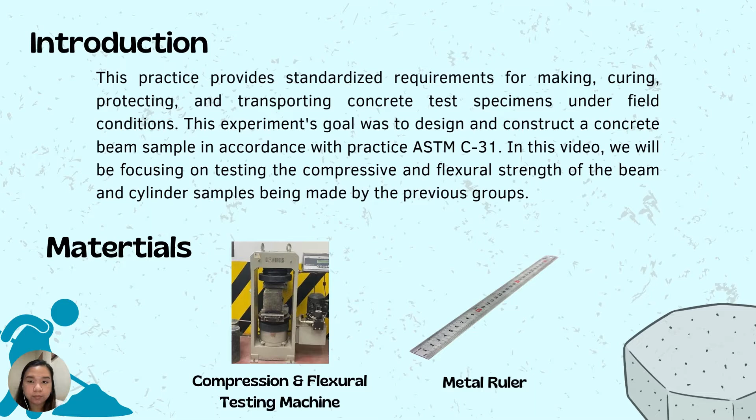The materials used are the compression and flexural testing machine and the metal ruler. The reference standard for this experiment is ASTM C31, also known as the standard practice for making and curing concrete test specimens in the field. In addition, we also have an additional database, which is the DPWH Blue Book.

Now we will proceed to the procedures for this experiment. First, using the metal ruler, measure the length, width, and height of the beam sample. For the cylinder, measure the diameter and also the height before putting it into the compression and flexural testing machine.

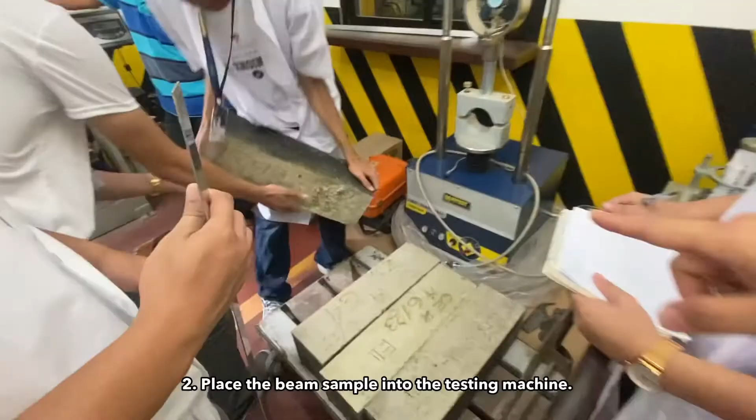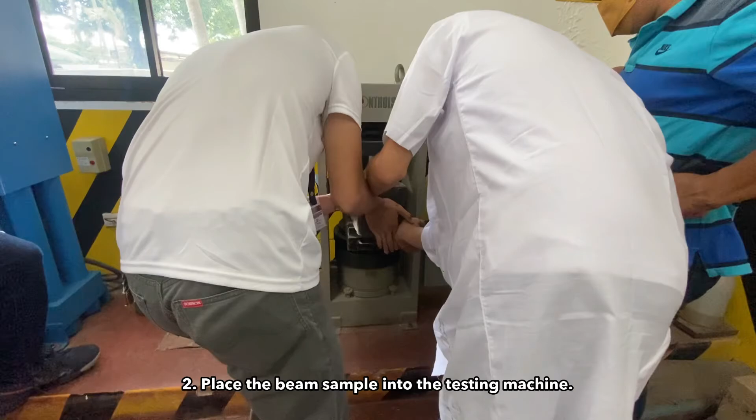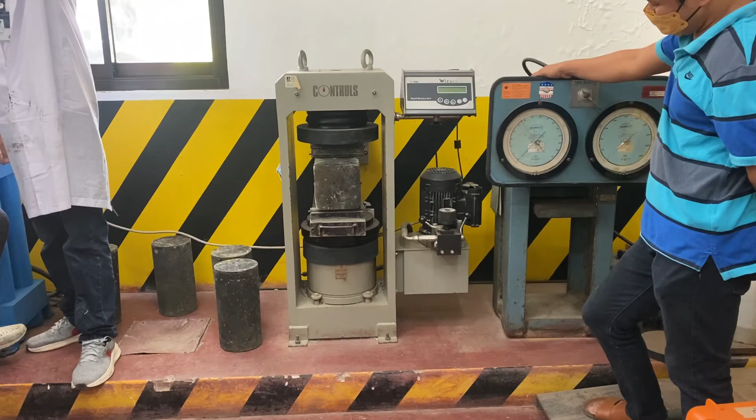Second, place the beam sample into the testing machine. Make sure that the beam sample is properly placed to ensure proper testing for the flexural strength. Third, after placing the beam properly, place the loading point plate to start the test. Fourth, stop the machine once the beam starts breaking.

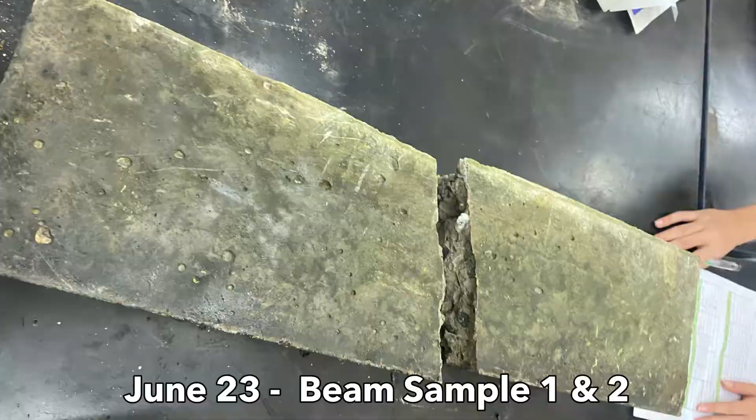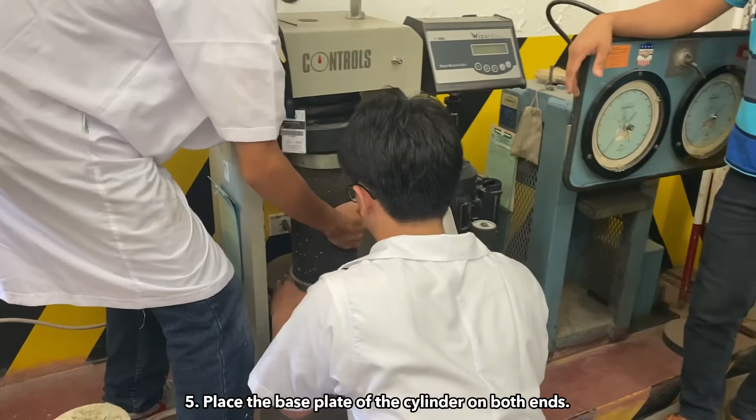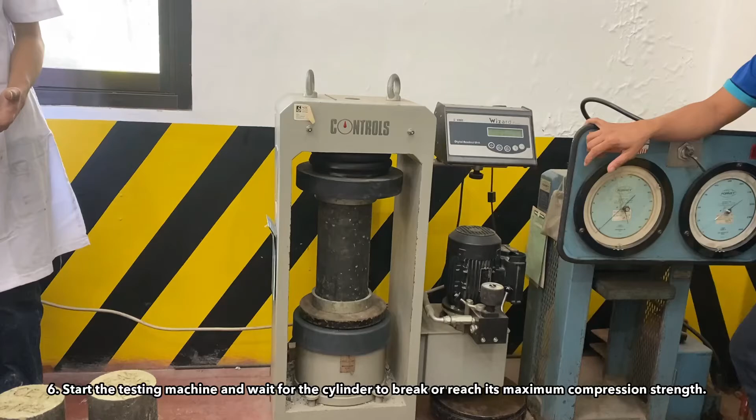Place the base plate of the cylinder on both ends. Make sure that it is properly centered to ensure the surface area being targeted on the machine. Start the testing machine and wait for the cylinder to reach its maximum compression strength.

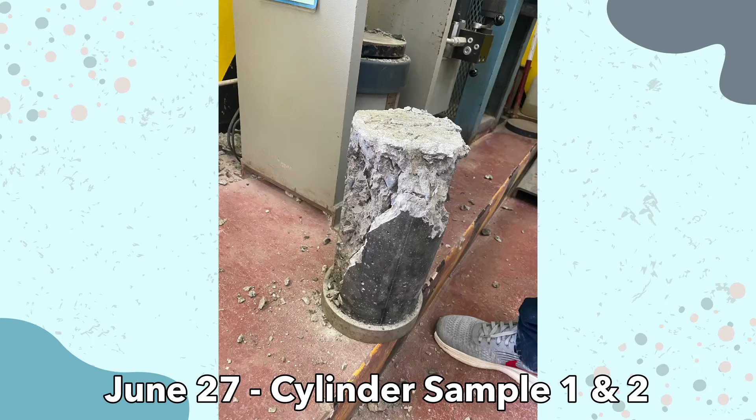Now we will proceed to the results and discussion. In this experiment, again, we have used the ASTM C31 standard, but we also have an additional basis, which is the DPWH Blue Book.

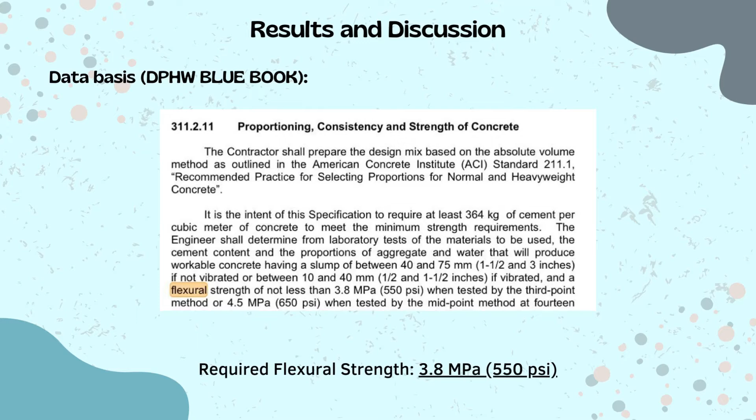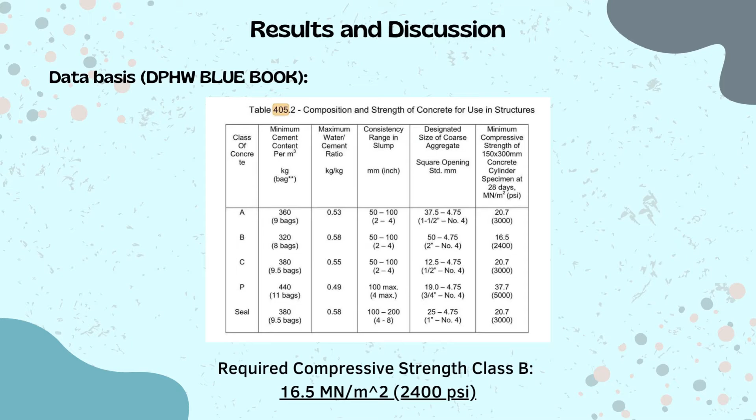According to DPWH Blue Book 311.2.11, entitled Proportioning, Consistency, and Strength of Concrete, it has been specified that the required flexural strength is 3.8 megapascal or 550 psi. On the other hand, the required compressive strength along with Class B in Table 405.2, composition and strength of concrete for use in structure, is 16.5 meganewton per meter squared or 2400 psi.

Now let us discuss the results of compressive strength for the cylinder samples done by the previous groups. We have the first batch conducted last June 23 and tested last July 18, which had 25 days for curing. The formula used for this is force over cross-sectional area of the cylinder.

For sample 1, we have a diameter of 0.155 meters and a radius of 0.0775 meters, and a force equal to 0.4487 meganewton. The units were converted to meters and meganewton to achieve the final unit of the compressive strength. So, compressive strength is equal to 0.4487 meganewton over pi times 0.0775 meters squared, which is equal to 23.78 MPa

or 3449 psi. For sample 2, we have a compressive strength equal to 21.05 MPa or 3053.04 psi.

Next is the second batch, conducted last June 27 and tested last July 18, which had 21 days of curing. For sample 1, we have a diameter of 0.156 meters, radius of 0.078 meters, and a force of 0.5817 meganewton. So compressive strength is equal to 0.5817 meganewton over pi times 0.078 meters squared.

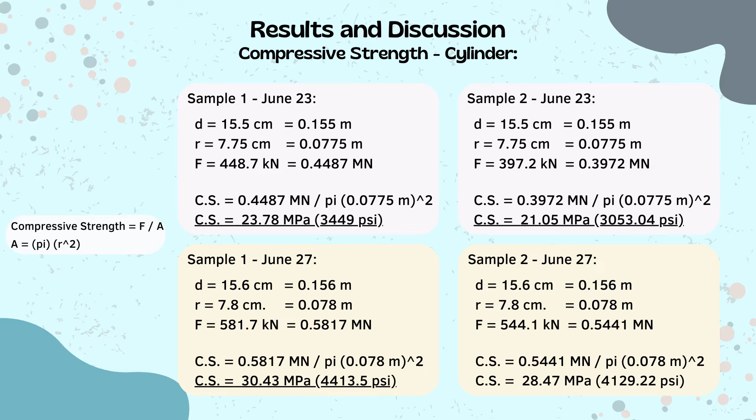For sample 2, we have a diameter of 0.156 meters, radius of 0.078 meters, and a force of 0.5441 meganewton. The compressive strength is 0.5441 meganewton over pi times 0.078 meters squared, which is equal to 28.47 megapascal or 4129.22 psi. After the compressive strength, we will now proceed to the flexural strength of the beam samples.

We have here the first batch, conducted last June 23 and tested last July 18, which had 25 days for curing. The formula used for this is FL over BD squared, where F is force, B is width of beam, L is length, and D is thickness.

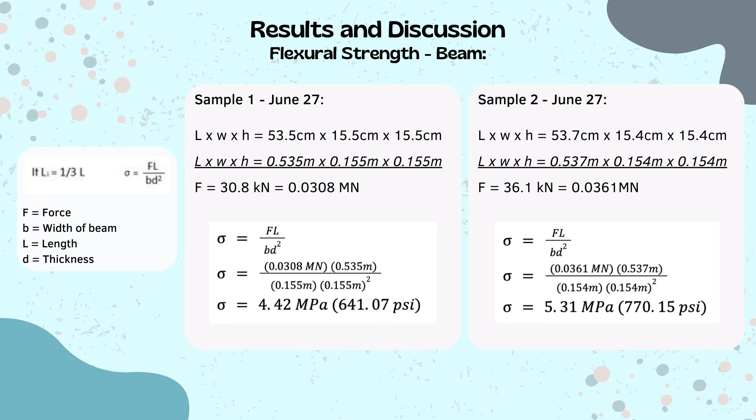So to conclude this experiment or video presentation, we have here two tables prepared so that we'll be able to compare the required compressive strength and flexural strength easier to the data.

First we have Table 1, which is compressive strength determination of cylinder samples. We have the first two samples conducted on June 23, which spent 25 days for curing: 23.78 for the first sample and 21.05 for the second sample. For the next batch, June 27, which had 21 days for curing, we have 30.43 and 28.47.

The required compressive strength, according to Class B of the DPWH Blue Book, is 16.5 MPa or 2,400 psi. As you can see, all samples have passed the compressive strength for this experiment.

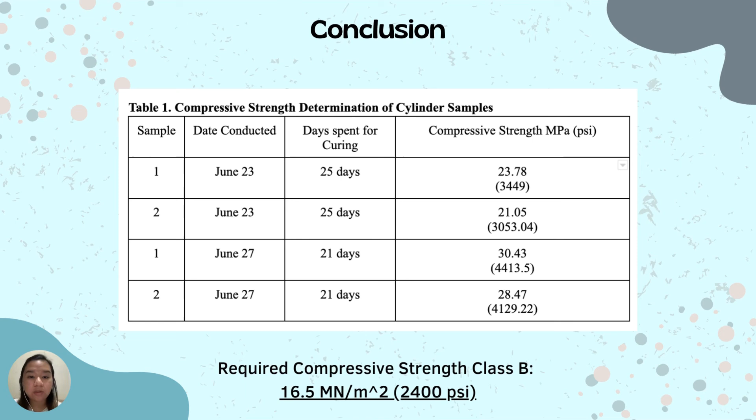For the second batch, conducted on June 27, which spent 21 days for curing, we have 4.42 and 5.31 megapascals. The required flexural strength is 3.8 megapascals or 550 psi. Again, as you can see, all the samples for the beam have passed the required flexural strength. With this, we can conclude that all the samples have reached their flexural and compressive strength before 28 days.